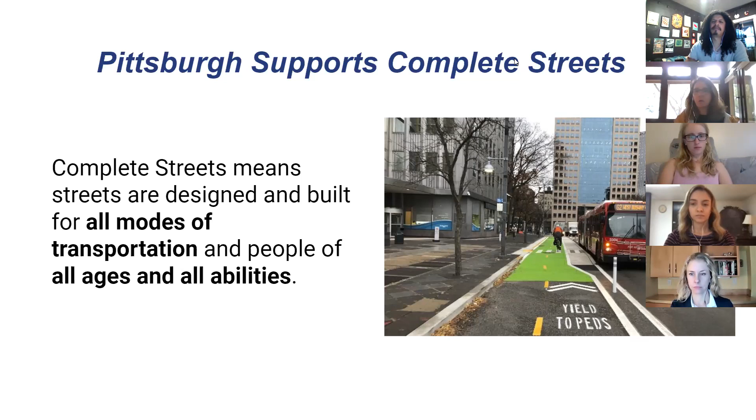Go ahead, Ricardo. This is in line with the Complete Streets policy that City Council adopted almost 5 years ago, which we're still working hard to implement. It's really just saying that while every street might not be comfortable and inviting, we might not have the ability, with our narrow little goat paths in Pittsburgh, to provide each and every street with a safe space for each and every mode to travel—but we can do it on a network level. That's really a lot of foresight by City Council, to take a network perspective to this, and that's what we're talking about here.

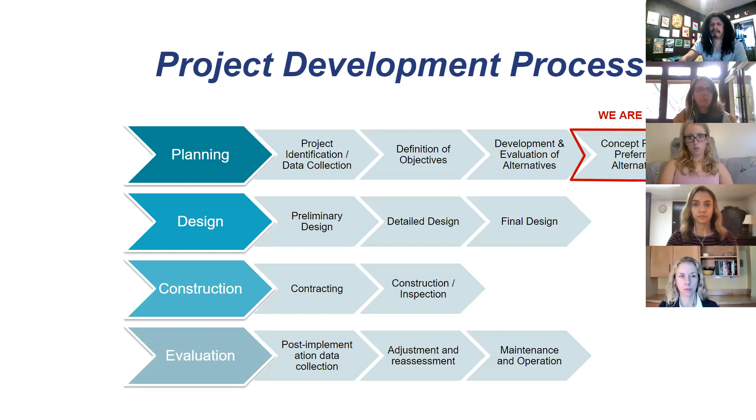Now we're at the point of trying to get narrowed down to what is that preferred alternative. We can't do nothing—we've seen serious crashes and injuries on this corridor, in this portion of the city, so we have to do something that can make that better. This exercise is really trying to figure out the preferred alternative where we can provide a safer place, but also balance with all the other demands in this area.

One more slide, Ricardo.

This is the series of public and advisory meetings that have been had. We've been with you quite a bit. We've also had, I think, 5 or 6 advisory committee meetings, where we have a really diverse body that represents all the different interests that are prevalent on the corridor, so that we can have some candid conversations and get some candid input. If you can go, Ricardo, to the next slide.

Following the last meeting, we put out a survey to which we got really great participation, 205 responses, to understand what are the priorities for the corridor, and of those 7 alternatives we put forward, which ones really seem to work for you.

Of the things we heard, speeding was something that cut across almost all participants. 70% said that speeding vehicles on some portion of Ellsworth, or in the local neighborhood but predominantly on Ellsworth, were a concern. Nearly as many were concerned about careless driving, not feeling safe crossing crosswalks, and not feeling confident that vehicles would come to a full stop at intersections.

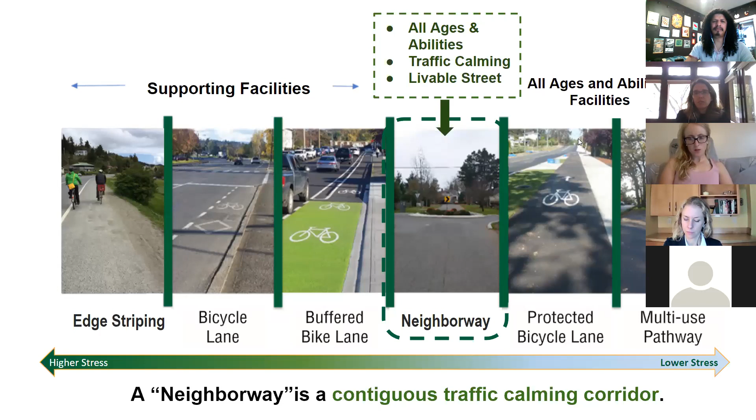You can flip to the next slide, but maybe we'll just briefly flip through that again. It's just showing where - all of these at this point are Neighborway alternatives, so no dedicated bike facilities, just sharing the street in a slower, more managed way, which on our scale of bicycle comfort falls in the middle. Protected bike lanes are better in general because they're protected, so they tend to be safer and more comfortable, particularly for less confident, more vulnerable people on bikes. Off-street trails are even better still. We don't have room for those here, although we did hear lots of recommendations about pursuing the busway and other things, which are not off the table but a little out of our control because we don't own those assets, and because they're down in a trench it makes connectivity more difficult. But the Neighborway is a lower stress, more comfortable facility - it does classify as an all ages, all ability bicycle facility for us.

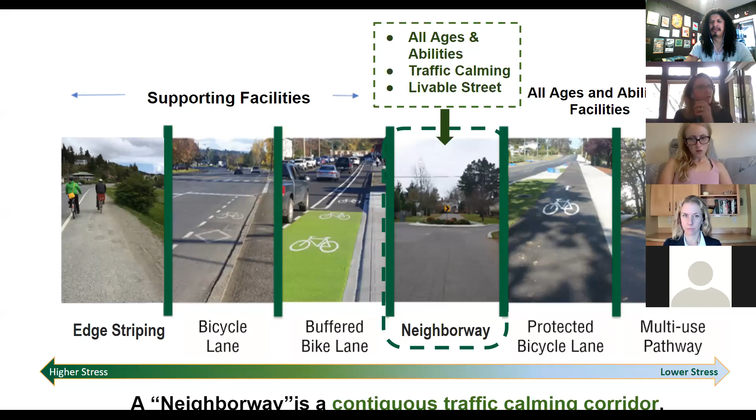Go ahead, Ricardo, yeah sounds good. Sorry to interrupt, we're still getting feedback comments. I don't know what to do about it. I'll hold the mic up a little bit and see if that helps. I don't know, yep. We're still - someday we'll get out of this virtual world we're in and meet for real.

Okay, if you can go, we'll just walk through these concepts then. So this is the Ellsworth connector.

Right now we have about 6,000 to 7,000 vehicles on Ellsworth. That is really too many for more vulnerable people on bikes to mix with motor vehicles. It's too intimidating, the vehicles get too impatient. There's just really too much friction, too much stress with those volumes. We do see higher rates of speed, we see a history of crashes, and a lot of that is associated with the speeds and the volume of traffic.

So this option would implement diverters to move traffic. We do know that people use Ellsworth basically as a parallel route to Centre and Baum and to Fifth Avenue, but they really have neither origin nor destination on Ellsworth. They're not there because they live there, or pray there, or shop there. They're there because it's a more convenient connection they've discovered over time. So it's really those vehicles we'd be working to move off the corridor. We would keep the corridor for the volumes of traffic that have destinations there.

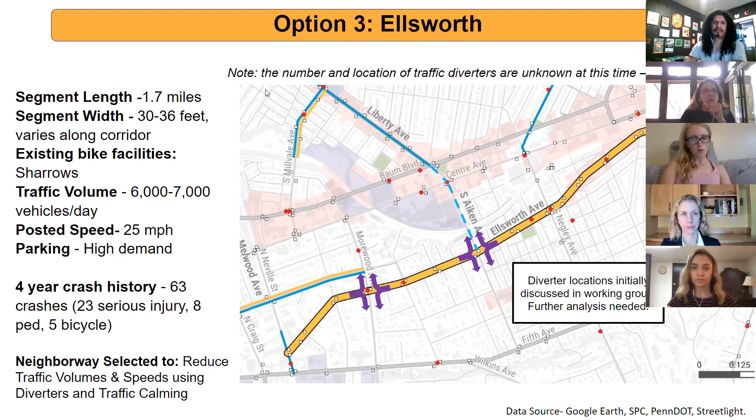We do recognize that Ellsworth really has three different segments of quite different character, and we'd need to think about how the diverters would be placed to keep those microclimates of Ellsworth together. We have the section from Neville to Aiken, which is much more residential, faith-based, and institutional. We have the section from Aiken to Negley, which is predominantly residential with some education there. And then we have the business section from Negley to Shady. So we want to keep those sections together, implement different strategies in different places so it can work appropriately, but keep those districts together.

So I know a lot of you are asking, what is a diverter? You keep using this word. A diverter is really just a feature in the roadway that would force traffic to turn either right or left. They would not be able to proceed straight at that location. So it might be signage, it might be some physical deflectors like curb extensions, it might be a mountable gateway of sorts, not dissimilar from a speed hump. But it would have the traffic turn either up toward Centre Baum or down toward Fifth Avenue to resume their journey on those larger, higher order streets instead of the lower order Ellsworth.

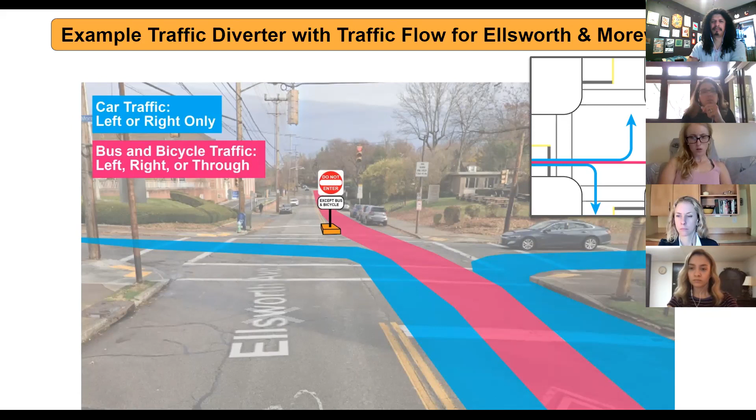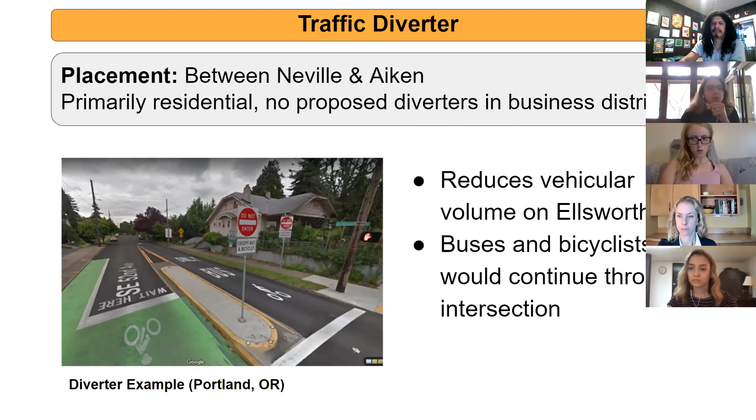This could be paired with additional traffic calming options to help. Those vehicles that still remain on Ellsworth—we anticipate we'd still be looking at 3,000 or so vehicles on each of those segments, even with the diverters in place—we want to make sure that those vehicles, which is a manageable but not insignificant amount of volume, travel at a safe and compliant rate.

So we might do this through tools such as bump outs, so we can shorten the pedestrian crossing distances, make that much more comfortable, give greater confidence to pedestrians crossing the street, maybe going from one business to another—much more inviting for them to do that. We might do that with speed humps to keep traffic slow, or through other tools and techniques for traffic calming.

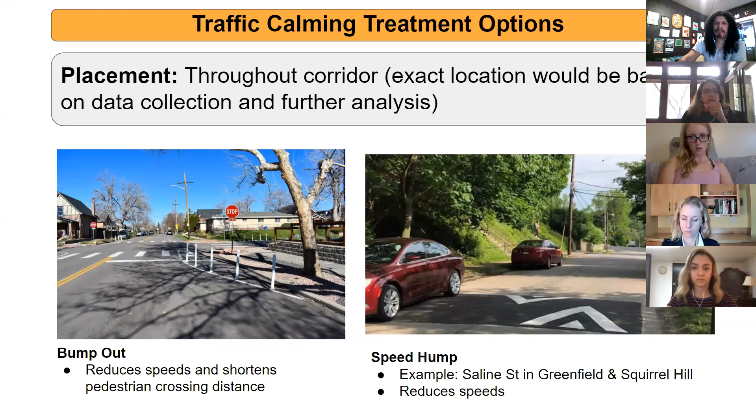We have looked at things like a pedestrian refuge island, high visibility crosswalks. These are, again, just other ways to keep the motorists alert, keep them moving at a slow rate of speed, and keep them together safely with the pedestrians.

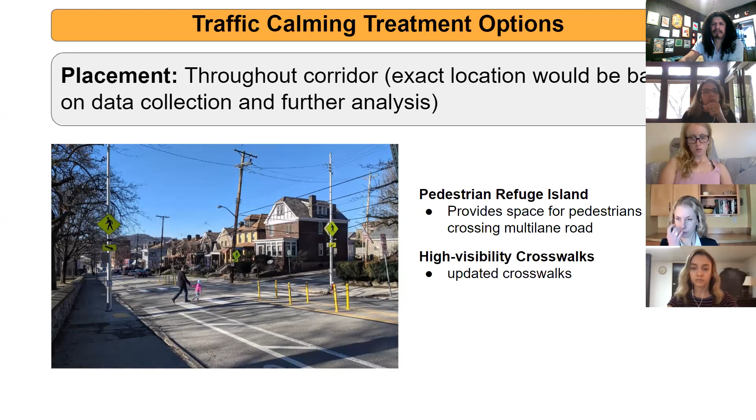So this alternative does not change the cross section. The experience on Ellsworth on each of those segments would still be the same. There would not be dramatic changes to the parking or the curb alignment. Again, some painted bump outs perhaps, but nothing more than that.

We can make it a more comfortable and low stress street by implementing some of those traffic options, and we would keep transit going along the length of the corridor so that you could still connect from end to end there.

So some of the challenges are that some portion of the traffic will shift someplace else. We will need to observe that some traffic will shift to other modes, so we may see higher bus ridership. We may see, as we would like to see, greater use of walking or bicycling for those very short distance trips happening here. But we will need to reabsorb the traffic somewhere in the network. It could be Centre, Baum, or Fifth. It could even be farther afield in the network as people figure out and recalibrate.

There may be some parking loss due to curb extensions and some of the chokers and traffic calming. These will generally be minimal—we expect most of them are frankly probably not legal parking spaces at this point anyway, so it'll just help with that compliance. And for the people on bicycles, we want this to be low stress. That will really depend on how effective these are at lowering vehicle volumes on the street, as to whether that's really a comfortable and lower stress experience.

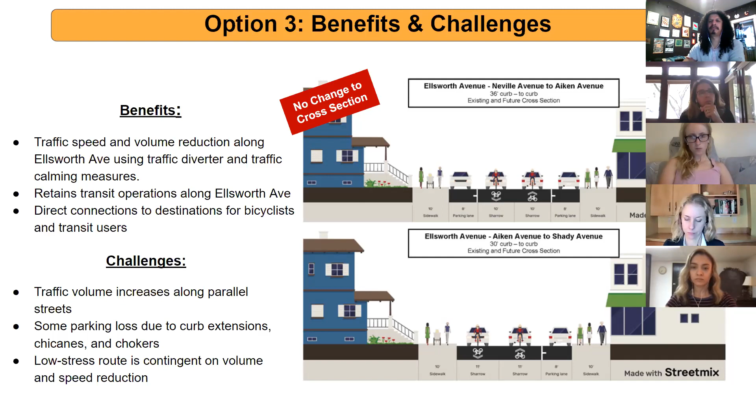Ricardo, if you can go to the next alternative. So that's the Ellsworth one, and that is the only remaining alternative on Ellsworth that we're talking about. We are not really advancing the notion of protected bike lanes or one-way operations on Ellsworth. To provide that accommodation, we would do it without altering the street, other than discouraging through traffic, cut-through traffic for the length of the street.

Alternative 5 is really looking at an alternative route in the neighborhood, as we mentioned before, using Spahr and Walnut. If you can go ahead.

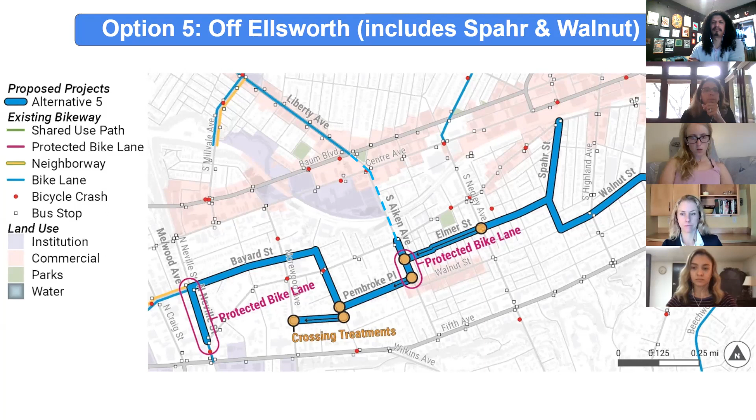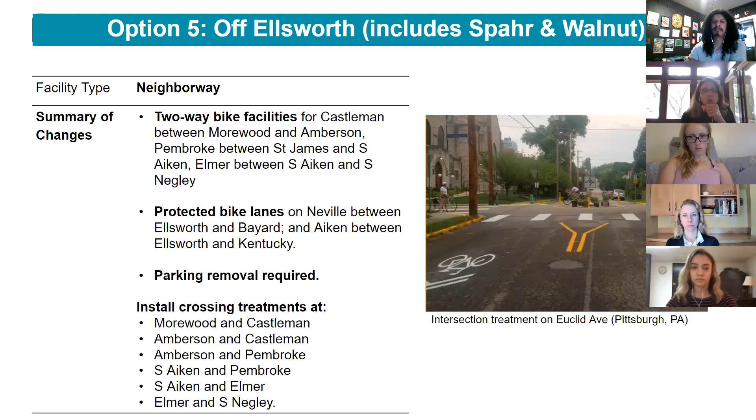So this outlines that this would be a two-way bicycle facility, on some of them protected bike lanes, on some of where we need to make those jogs, particularly on Neville Street and Aiken, because there are not other continuous through streets through Shadyside, so we will need to have the bikes jog up and down. And we would need to really deal with the crossings to make those crossings safe. So there's a series of crossings that people on bikes and pedestrians would need to do to use the Spahr and Walnut neighborway.

We'd also need to add quite a few traffic calming treatments on the different streets, and again that would be to keep traffic speeds low on those parallel neighborhood routes.

And so again, we would use different pedestrian refuge islands, high visibility crosswalks, things like that, that can help increase visibility on that corridor and decrease travel speeds.

More using the bump outs, perhaps neighborhood traffic circles, as we've implemented in the Bloomfield neighborhood, again just at those crossing locations where we're going to need to create that safe crossing for different users.

But the biggest impact of this one would be that we would need to provide protected bicycle lanes on the higher order streets of Neville and Aiken in order to have that all ages, all abilities connection through these streets. We cannot provide that because the volumes are too high to have vulnerable people on bikes share the lane on those streets. It's not something that you would put the 14-year-old that you love most out in the middle of. And there's not space to just stripe it in without altering something on the street.

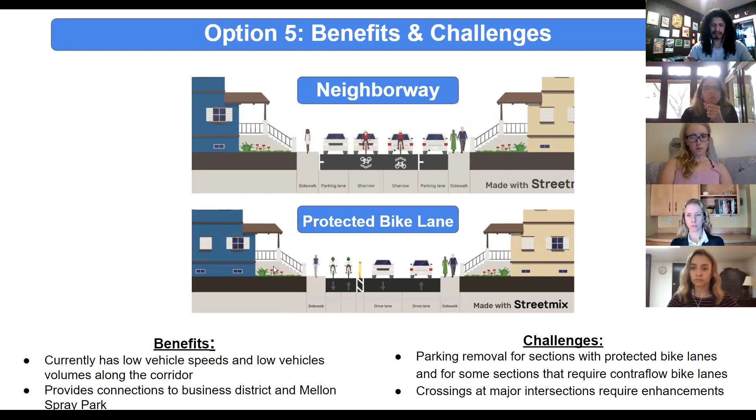If we go to the other neighborway alternative, option 6, Ricardo, go ahead with the next slide. This one really uses Kentucky and Howe. Again, you can see those north-south jogs that happen. This one includes a longer segment. Obviously Kentucky and Howe are further south than Elmer, so we end up with a longer segment that will need that protected treatment. So again, those north-south-ish corridors are the ones where we do need parking removal in order to get that bike facility in.

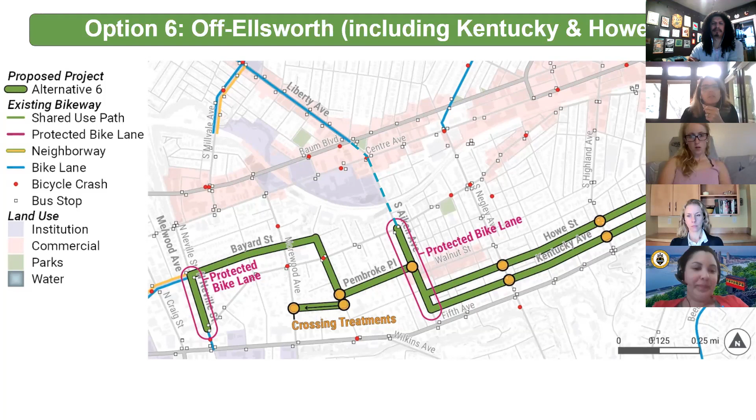If you go to the next slide, lots of the same treatments. So we would have lower speed streets. We'd be looking at two-way bicycle travel on those neighborhood streets, and then protected lane markings on the high order streets.

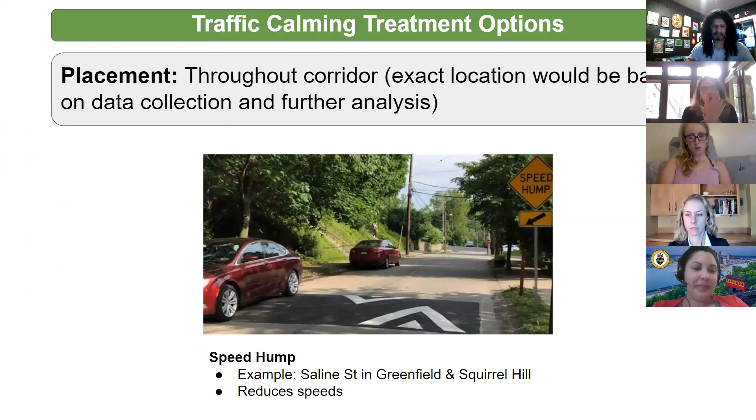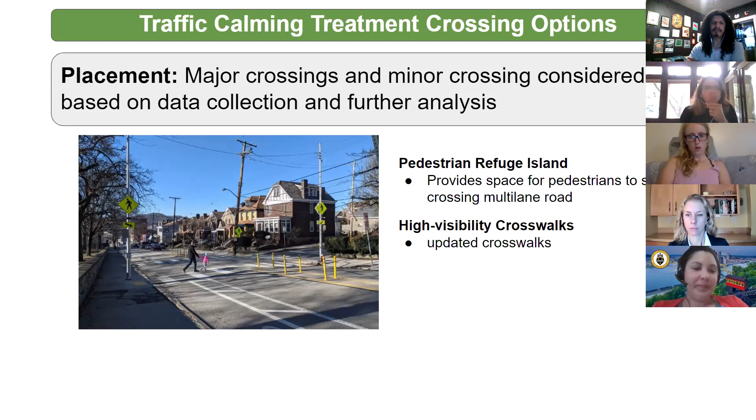We would again be looking at traffic calming on those local residential streets, to keep traffic volumes and speeds low. The major and minor crossings are a challenging thing that we would need to increase visibility of. We would need to slow speeds and really ensure motor vehicle compliance so that we're not putting vulnerable street users in risky situations as they cross those streets. There are a number of crossings that need to be addressed on those neighborways.

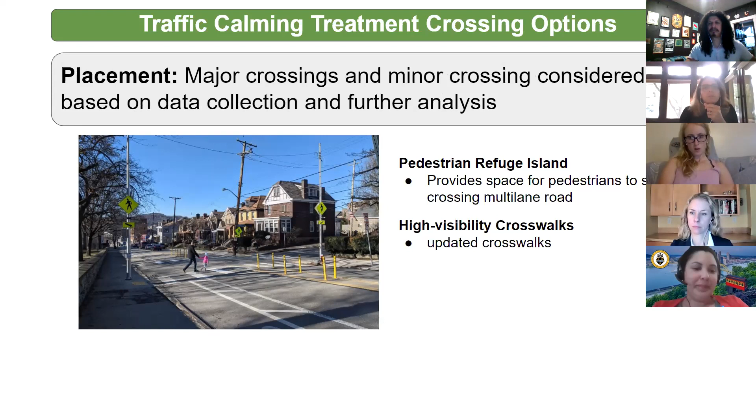So we would again be looking at different strategies to improve those crossings. It might be bump outs, it might be mini circles. This is not designed yet; these are just tools that we have that we would be looking at to address those crossings if we were to go with the neighborway route.

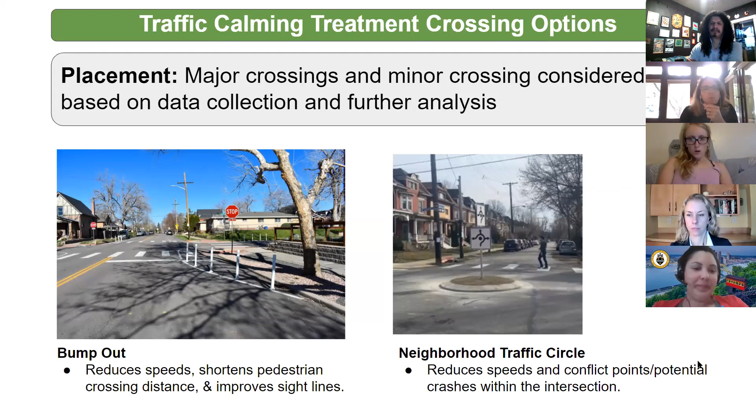Similar to the other option, we need to provide the all ages and abilities facility. So if you're going to have a 70 or 75-year-old out there biking, or a 13 or 14-year-old trying to get to school, we need to make sure that they are safe. That is the priority of this project. In order to do that, we do need to have a protected facility on those busier cross streets.

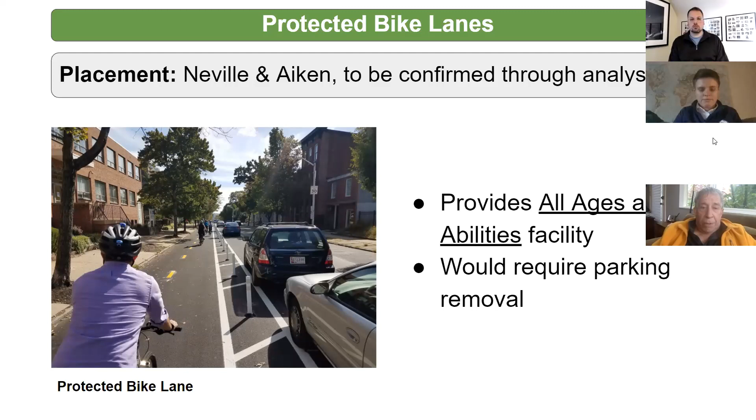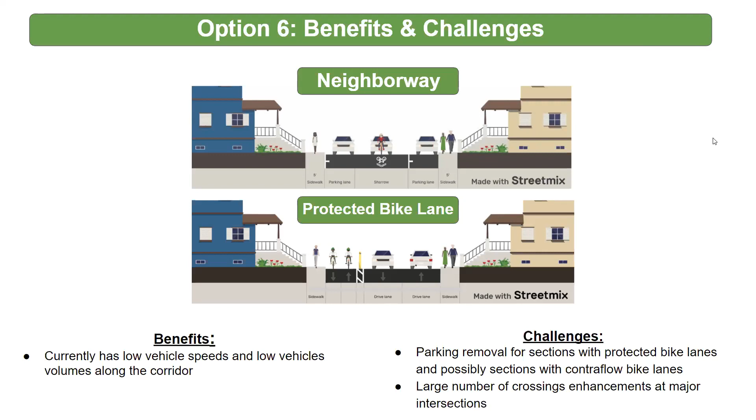So go ahead, Ricardo. Basically the same concept as option 5: on the roughly east-west streets, the neighborways would really require no alteration besides traffic calming, but on the north-south streets there would need to be alteration with removal of parking to provide that two-way cycle track on one side of the street. That's how we can provide that connection in the safest possible way.

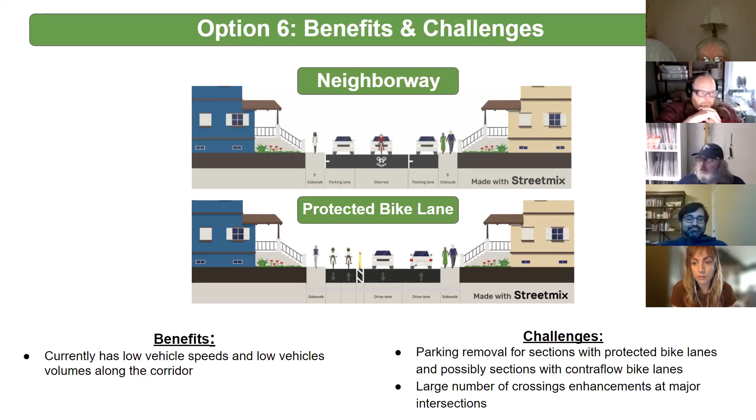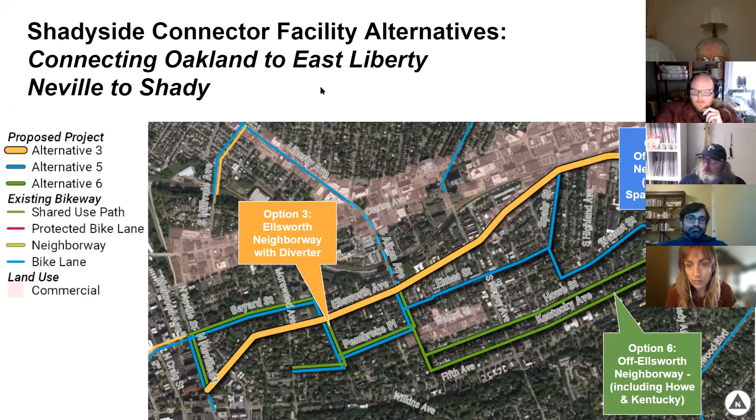So if you want to go to that map, let's pause there so you can see on the network of streets what the three options that have progressed from our last meeting are. And I'll let Ricardo facilitate a discussion on this.

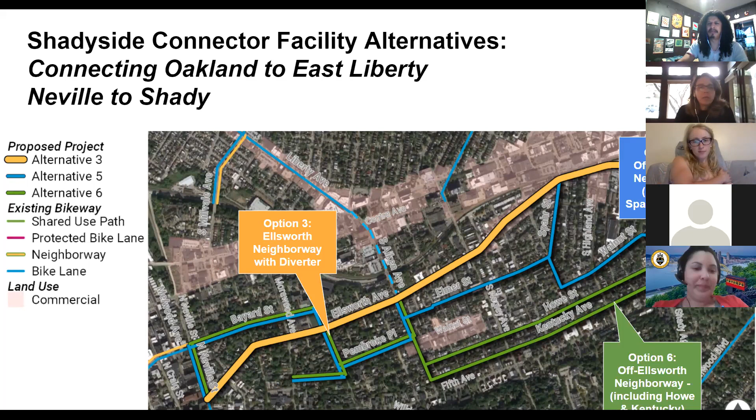Yeah, we can keep going, Ricardo. That answers some of those next steps. There you go, next steps, next slide. So we do have these three alternatives that are still out there. I'm very happy for the people taking the all-of-the-above perspective, but if you could prioritize your all-of-the-above, that would be great.

And so there'll be a survey, Ricardo, is that right? That will be out and about? Yes, maybe I can have Alex share that if you have it, but if not, I'll also be sending you that via email. So great.

So we've got, give or take, a month to really marinate on these, really think about what it means, ask more questions, poke us, we'll give you answers to these, think about it. But we do hope that we will be able to come out of this with a preferred alternative. I think the council person and myself, we've held office hours before. If we need to do that again, we'll make ourselves available for it. We want to dialogue with you on this, but we do want to move forward to get to at least an incrementally better place than we are right now.

So contemplate these. Go to the next slide, Ricardo. There will be office hours and those kinds of things. So there's a website, there's the survey link at the bottom, and this whole presentation will be up on the website. Oh yeah, I just wanted to add that Alex was able to share the survey, but again, just reminding everybody that I'll share with you the meeting, the presentation, and the recording as well.